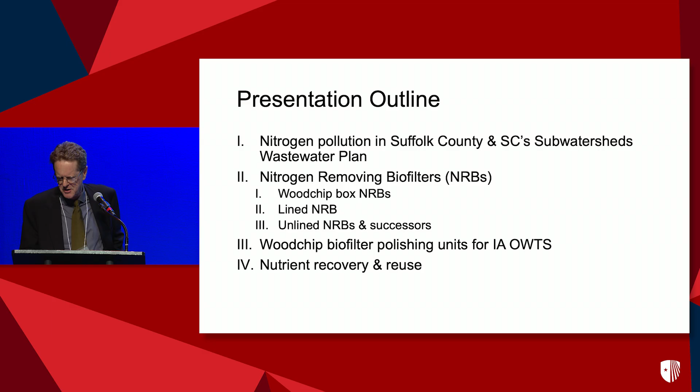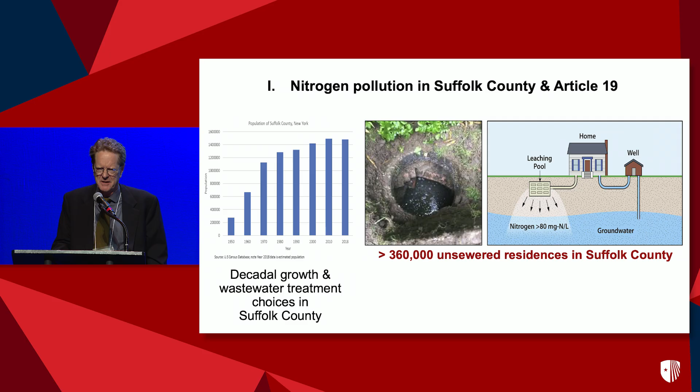Chris did a good job with this. Suffolk County's solution when the population was increasing so much in the middle part of the last century was the cesspool, and subsequently the septic tank and leaching ring. Those technologies do not remove nitrogen, nor do they remove any emerging contaminants. That saves some money in the short term, but it's not a great solution when your drinking water aquifers sit underneath those cesspools.

So what's the state of those aquifers now? About 10 years ago, DHS did some work which showed consistent nitrate increases in both the Magothy aquifer, the cleaner aquifer, and the one above it, the upper glacial. We took a look just recently at some more recent data, and those increases continue to be sustained.

But not only does the nitrate in our aquifers keep going up, it's already at a very high level. USGS monitored nitrate from public supply wells all over the country from 1988 to 2018. In that period, the median for nitrate in those wells was 0.4 milligrams per liter. So you look at the upper glacial, we're approaching 10 times the national average.

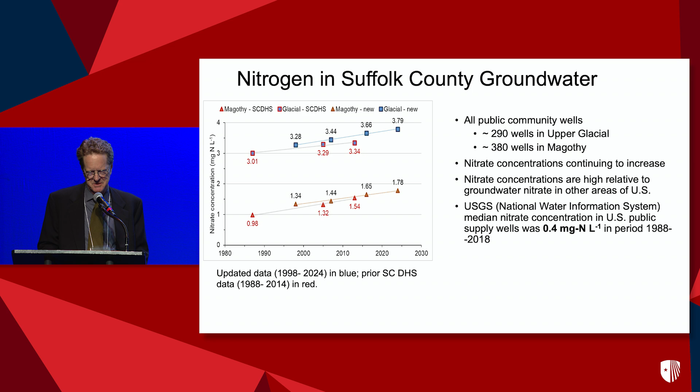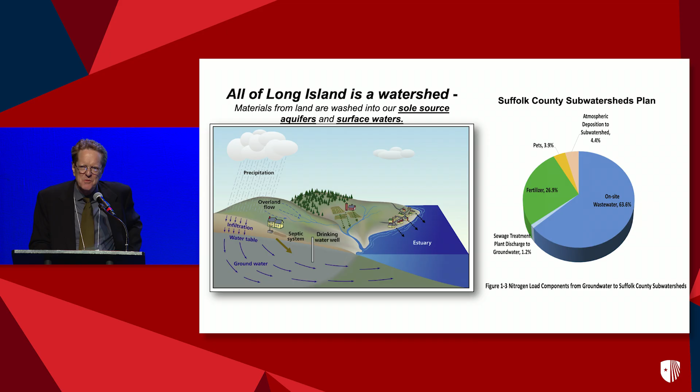Most of that water, as Chris has described, most of that nitrate is coming into those estuaries from on-site wastewater, about 2/3 of it. That's a problem for 2 reasons. One, Chris has already discussed, really negative effects on our estuaries and embayments: harmful algal blooms, algae blooms, fish kills, and loss of salt marshes, collapse in shellfish fisheries.

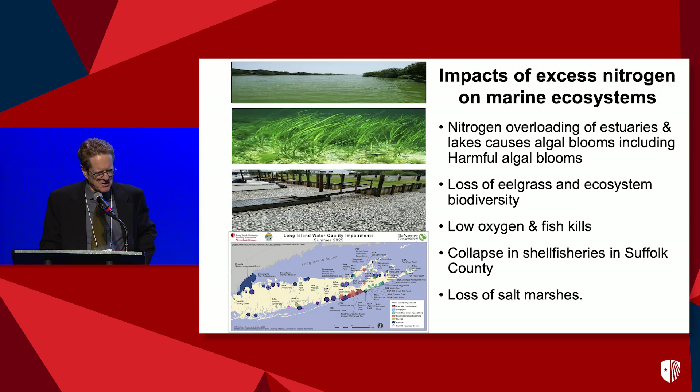But there's a second issue as well, which is that elevated nitrate is a public health concern. The World Health Organization categorizes it as a probable carcinogen. The EPA set an MCL, that's a maximum contaminant level, of 10 milligrams per liter, and that was to prevent something called blue baby syndrome, which is a very serious illness, but a very rare illness. And that was done decades ago.

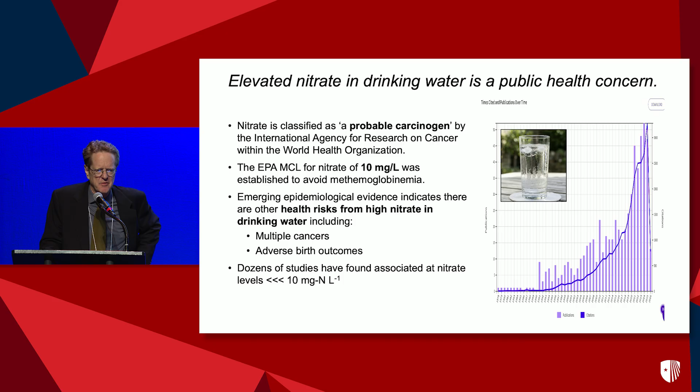In the intervening years, there's been more and more epidemiological research done on the health risks of nitrate in drinking water, particularly related to various cancers, but also birth outcomes. Some of those studies were inconclusive, but dozens of others found nitrate relationships with those illnesses at levels much lower than the current EPA drinking water standard.

The good news here is what you already got a bit of an idea about, which is that the politicians here and the authorities in Suffolk County are really committed to solving this problem, and they've got a great plan called the Subwatersheds Wastewater Plan. It's very comprehensive, and it has feasible, achievable solutions.

In addition to making funds available for sewering and for paying for conversions for homeowners to nitrogen removing systems, it also sets up a permitting process. And that permitting process has been very effective at identifying solutions that work and ones that don't, so we don't waste our time and money with what doesn't work.

So the systems up here that are approved, there are 7 of them. They're available for commercial use, either in provisionally approved or general use permitting. And they're all good. 5 of them are proprietary systems, and 2 of them are non-proprietary systems. We make these designs available for anyone who wants to install them.

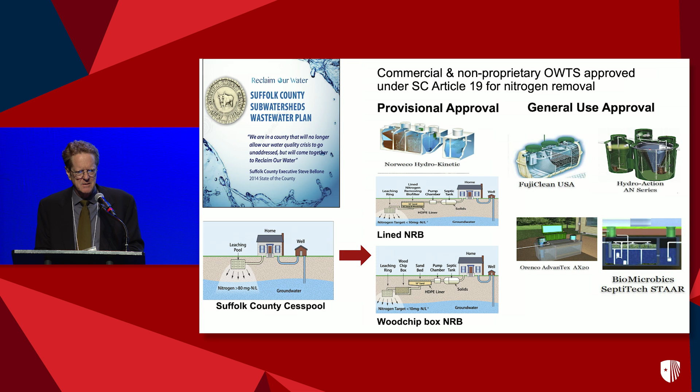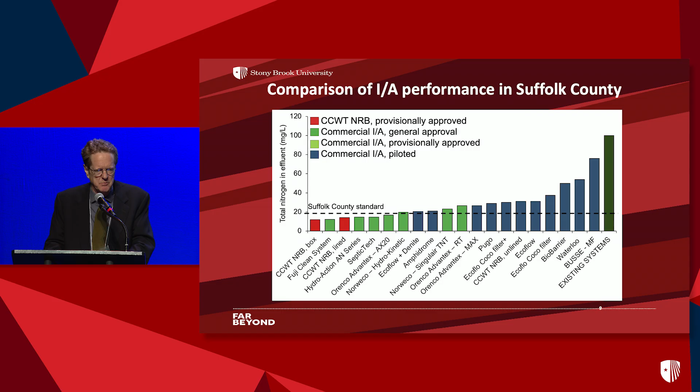So I'm going to talk now more specifically about our nitrogen removing biofilters. What they do happens all over the continental shelves around the world, and in forests all around the world. It's called biological nitrification denitrification. We just speed that process up with this technology.

So we take septic tank effluent from a septic tank, gets piped into a sand bed where there's 18 inches of sand, just C33 concrete sand. And that's all very oxic. As that wastewater percolates through that sand, it gets oxidized.

So it's transformed from compounds like ammonia or urea into nitrate. From nitrate, it can be denitrified with carbon. You need carbon for that process, and we supplement the carbon that's already in wastewater with wood chips. And you turn it into air. So that's what these systems do. They turn pollution into air.

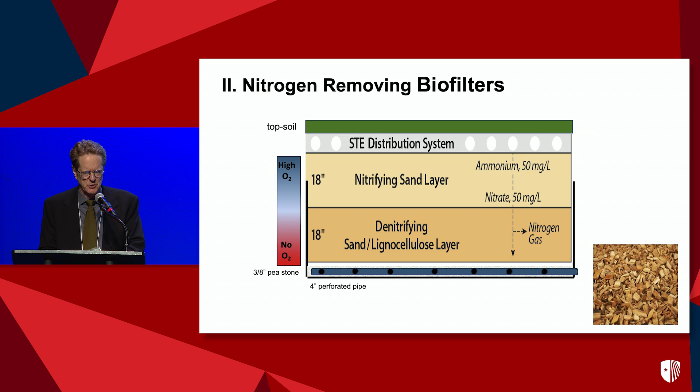We have 3 different designs. 2 of them I've already alluded to that are in the provisionally approved phase. All 3 of them have 18 inches of sand for that nitrification. The first 2 that are provisionally approved capture that percolate, contain it so that you know how long it's sitting in that biofilter in the wood chips. So you know the hydraulic residence time, and you can control it. And you need to be able to do that.

The difference between the 2 systems is that the wood chip box biofilter allows you to supplement wood chips over time, whereas the lined system has 6 times more wood chips. You don't supplement the wood chips.

The unlined system hasn't achieved the targets. But to me, it's our most interesting system, because you'll notice on the diagram there, the first 2, well you have to line them, which is expensive, and then you have to put in those leaching rings that we see all over the county, those cement structures with the windows in them. You don't have to do that with the unlined. It goes directly to groundwater.

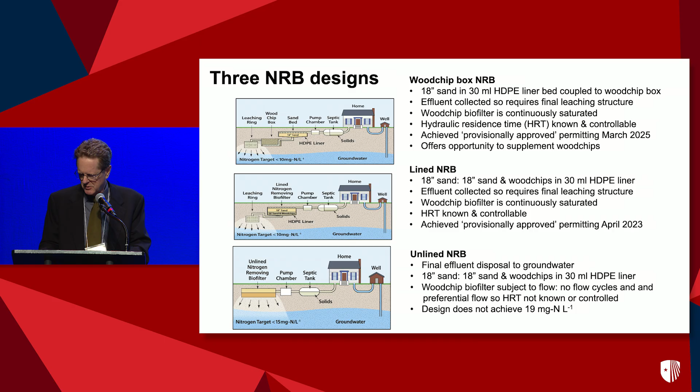So I'll talk a little more about these systems, but we have 26 of them installed around the county so far, and plans for more.

So the wood chip box biofilter, it's averaged, since its inception, the first one went in about 7.5 years ago in Suffolk County, 11.4 milligrams per liter, or about 87% removal. In the last 12 months, it was 12.5, about 82% removal.

We have another one in progress, and we've received funding from the Long Island Sound Futures Fund for 10 additional systems to put on the North Shore. We're working with great partners who have volunteered residential sites on their properties: Stony Brook School, Cold Spring Harbor Labs, the Nature Conservancy, 3 Village Community Trust, and New York State Parks.

Our center is deeply indebted to these partners, great collaborators. Our idea is, once we get 10 more systems, we'll hit the minimum to start testing for general use, and we'll test for 2 years.

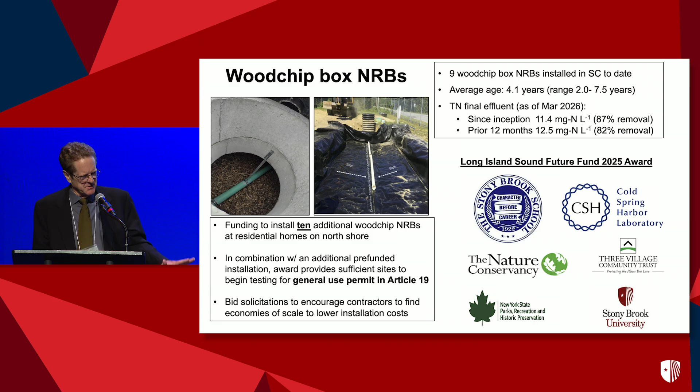We think that, and so the other piece of this grant is that we've set up the bid solicitations in a way that will encourage contractors to give us low prices by economies of scale. If you give them piecemeal work, it's not as easy to get good prices.

Lined NRBs again work very well, mid-80s removal, around 12 to 13 milligrams per liter nitrogen final effluent, well below the 19. Can we achieve this? All those systems have pumps, every system in the county has pumps, uses electricity. Can we do that with gravity with these systems that are working well?

Well, we have a prototype that's been in place for 8.5 years at the Massachusetts Alternate Septic System Test Center. What we did last June was we ripped the distribution off the top of it. We left the sand and wood chips in place, those are very valuable, being aged. And we put a gravity dosing system, pictured at the bottom of the page here, on top of it. We're still testing that.

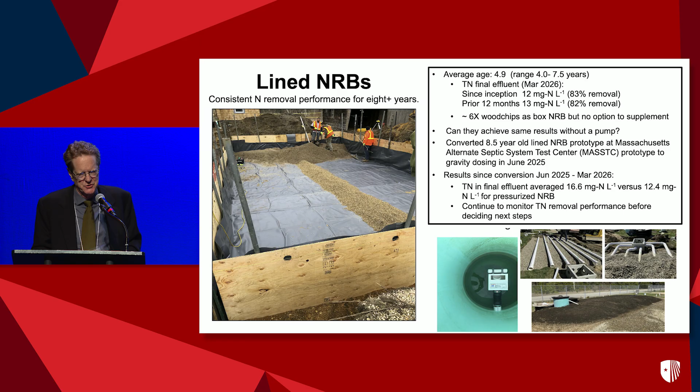So far, it's gone through the winter where it's a little harder to achieve low effluent levels, but it's been 16.6 milligrams per liter versus the 12.4 it had before we made the conversion. So, work in progress here.

Our real R&D focus for nitrogen removal is figuring out ways to get those unlined NRBs to work. We're taking two approaches to this important research area. One is a gravity-based NRB that has a Septi-Surge dosing system and an Eljen disposal system attached to it. Second is what we call a multi-layer NRB.

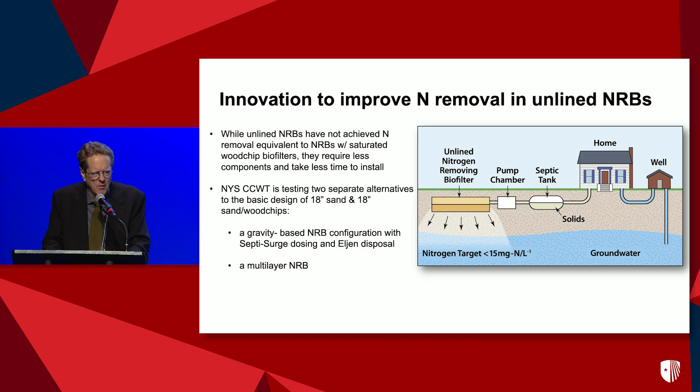In that gravity system, wastewater comes out of the septic tank and builds up in a dosing reservoir to a certain elevation, which triggers the Septi-Surge to flush that septic tank effluent into the Eljen geotextile sand filters. Those sand filters sit in an unlined NRB, 18 inches of sand and 18 inches of sand and wood chips.

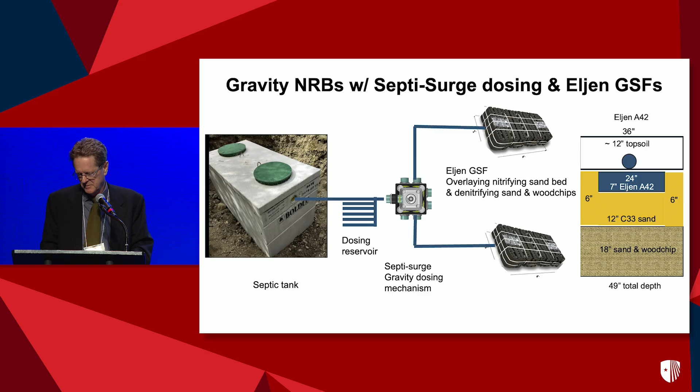Does it work? Indian Health Services in Shinnecock Nation put in these systems over 3 years ago, and we've been monitoring them since. These systems use no pumps, no electricity, and have very low O&M. 5 out of 6 systems get 4 or less milligrams per liter. The outlier brings the average up to about 12.

Another example of a partnership: Suffolk County Water Quality PRP awarded our center money to install 5 of these exact same systems in Suffolk County. We're going to be putting those systems in over the next several months, so within 15 months we'll know if we have low-cost systems that produce very, very low levels of nitrate.

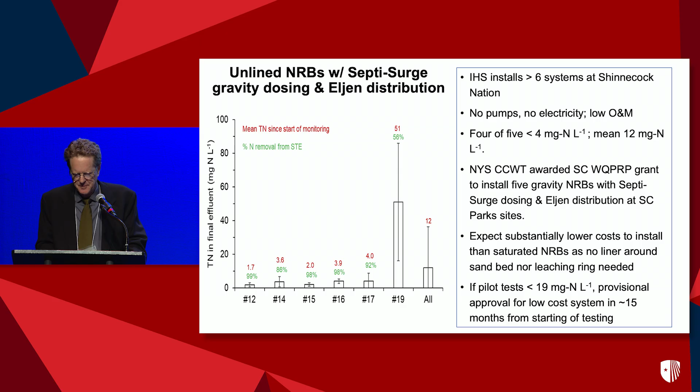The multi-layer system I mentioned before is also unlined, but we break up that wood chip biofilter because what we noticed from our earlier work with unlined systems is that even though the water percolates very evenly through the sand, when it hits the sand and wood chip it begins to get preferential flow.

So what we've done is, every 6 inches of sand and wood chips, we put 2 inches of 3/8 inch pea stone. That does two things: it causes a capillary break, slowing the percolation down and allowing more treatment time, and it spreads the flow more evenly so we don't get that preferential flow which speeds up and reduces treatment time.

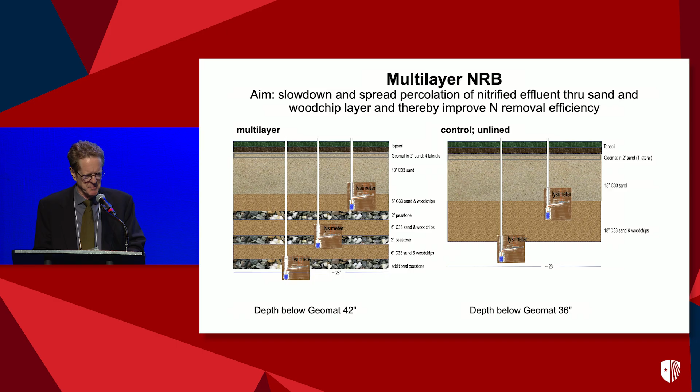How has that worked? We started this in March of 2023. Over that period we've had to amend the influent so that it's Suffolk County-like. Suffolk County has really high septic tank effluent levels, because we monitor it at those 26 sites I showed you earlier—over 90, compared to the 60s national average, so about 50% above the national average.

The unlined system we use at Mastic serves as a control. It's right next to the multi-layer and receives exactly the same wastewater. It reduced that 90-plus effluent by half. The multi-layer reduces it by 84%, consistently to about 15 milligrams per liter. Again, no septic, no leaching rings, no liner, and it does it in much less time.

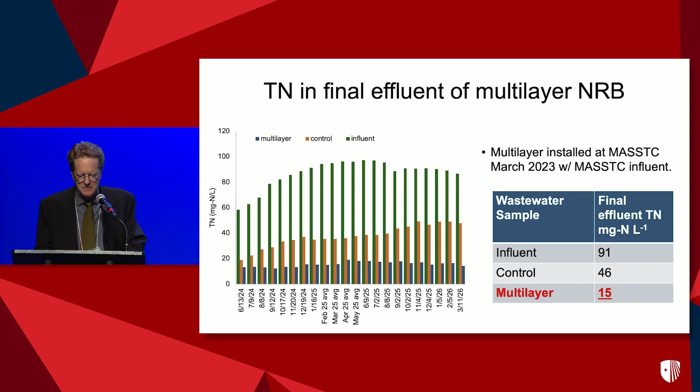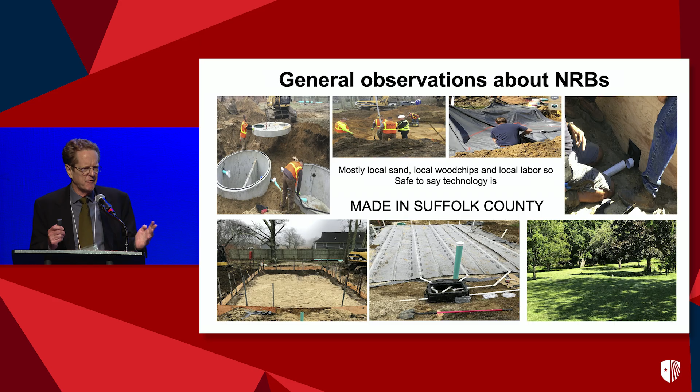So a couple of general observations about nitrogen-removing biofilters: they are truly made in Suffolk County—local sand, local wood chips, and local labor. Our center is working with installers to increase the base of installers who are able to do these installations.

We're also often asked what wood chips work best, and the answer is oak. It's also a good idea not to have debris in your wood chips, and if you're interested in that, I can talk to you about it at lunch.

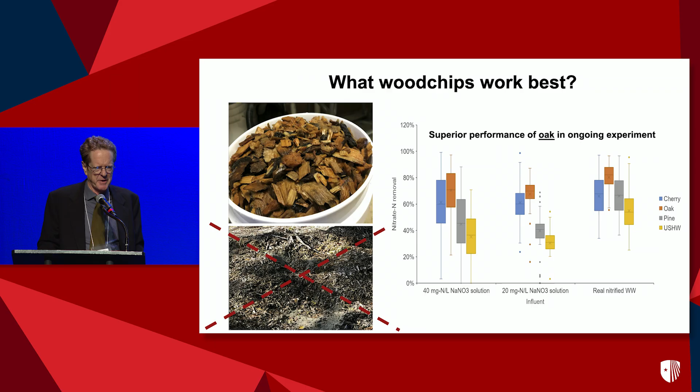How long do wood chips last? With a collaborator, the Massachusetts Alternative Septic Test Center, we've been working on this. We have a wood chip box NRB up there that's been in place almost 10 years. Since inception it's been getting 11.5 milligrams per liter total nitrogen in the final effluent. In the last few years that level has risen—in the last 12 months it was 16.5, still passing Article 19, but not as good removal.

What we did was take some wood chips out of the system and put them in a bench-scale experiment where we loaded it just like in a wood chip box, upflow. We loaded it with 31 milligrams of nitrate, and it reduced that to 3.3.

In other words, 89% removal, exactly what it got when we first started out 10 years before. In the first several years, we were getting high 80s removal. The point here is that the remaining wood chips have not lost their denitrification capacity. They still work, but they've been denitrifying for 10 years, so there's less of them.

So what do you do? Well, you could supplement, because you can open that wood chip box and put more wood chips in. How much more wood chips do you need? Well, about half of what would fit in a Ford 150 pickup truck. So supplementing is just part of ordinary operations and maintenance.

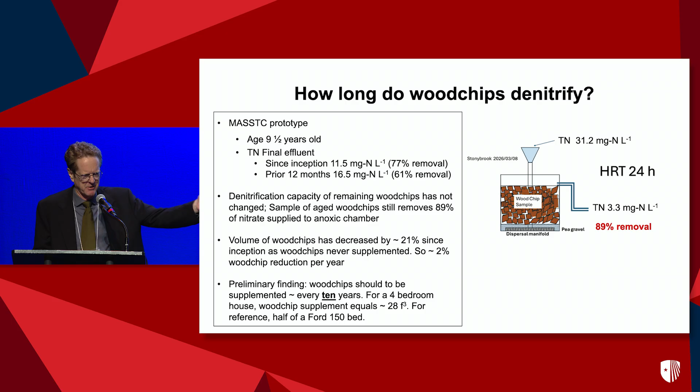And then the lined and unlined NRBs, well, they have 6 times more wood chips, so they're lasting decades and decades. They do take up more land though. That sand bed is big, about 600 square feet for a 4-bedroom house.

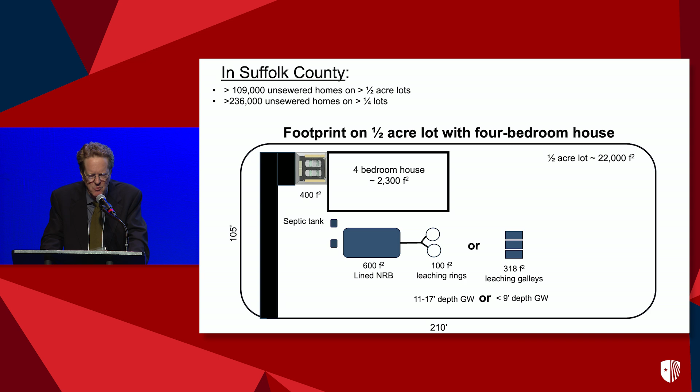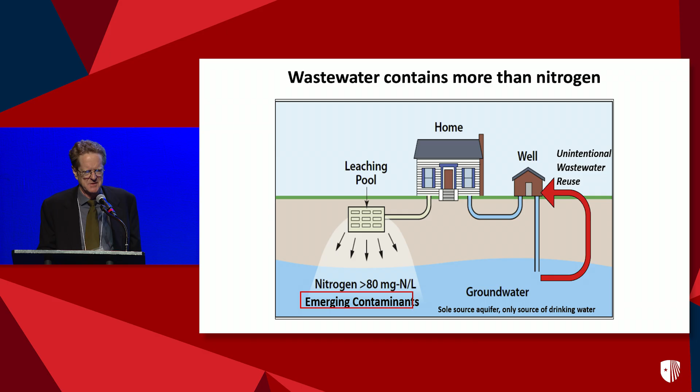But there's something that comes with that large sand bed. Because, as Chris has mentioned, it's not just nitrogen that's in our residential wastewater. There are pharmaceuticals, personal care products, organic contaminants, phosphorus, and a lot of other things you wouldn't like to drink, like anticonvulsants, or I personally wouldn't.

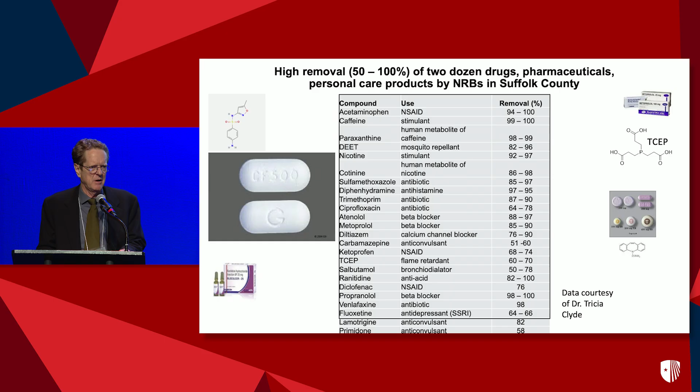And so we had Dr. Tricia Clyde get her degree studying our NRBs and how they treat organic contaminants from common household products. And what she found was that not only are NRBs capable of removing organic contaminants from personal care products, but they do a better job than conventional wastewater treatment systems, or as good.

But more importantly than that, she found it wasn't just that large sand bed was absorbing those contaminants as a problem for a future generation. They were metabolizing those contaminants, getting rid of them, and that's really critical.

A driving force in this was her professor, Bruce Brownawell, who is one of the founding members of our center and made enormous contributions. Very unfortunately, and very too early, he died last year of ALS. He is certainly sorely missed at the center.

I'd like to talk about coupling these wood chip biofilters to commercial technologies available for nitrogen removal. Just very briefly, Massachusetts - one thing those nitrogen removing systems, referred to as IAs, are really good at, because they have aerators, is nitrifying. They nitrify really well. If you look at what's in their residual wastewater, it's nitrate.

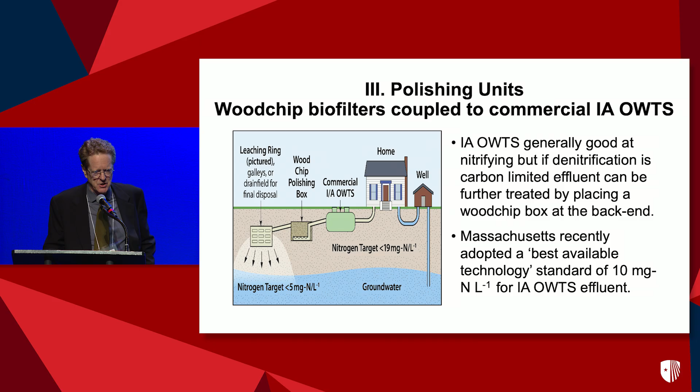So to get down to that, how do you do that? Well, a wood chip box polishing unit is one way. We put one of these down in Wainscott back just around the time of COVID. It's been averaging - the system itself, the IA itself, didn't meet the 19 milligram target, it's been about 25 milligrams per liter. Our wood chip boxes reduced that to 9.

We put another, actually better designed system in Sag Harbor, with the same influent coming from that IA in the mid-20s, and it's reduced it to under 4. We just put one in Montauk. We want to put a lot more of these in.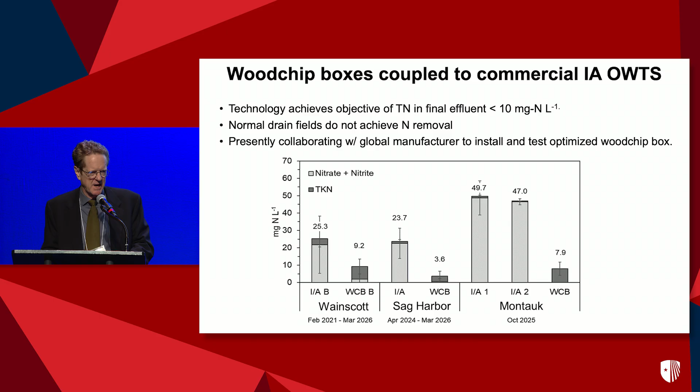We're doing that because there's no secondary treatment in Long Island soils, or most of them. The percolation rate is too fast. So we're working with a global manufacturer to install, test, and optimize more of these systems so that we can get really low nitrogen levels.

I'll talk very briefly about urine diversion. The idea here is you first separate it, store it, disinfect it, and then you can either apply it directly or capture the nutrients. In general, that's a really good idea because there are a lot of places where it's really difficult to put in an IA system or any kind of on-site system, like a beach, a public bathroom at a beach. It's difficult because the strength of the wastewater, the nitrogen, is really high. But most of that nitrogen is contained in urine, not in other components.

So you can save a lot of valuable clean water that could be used for better purposes than flushing a toilet. But there's even more benefits in Suffolk County because New York State parks now segregate their wastewater.

So we have a source of urine. We don't have to, like they have to in some states, pass plastic bottles around the university to do this testing. We get it from the New York State parks. We have a sole source, as you all know, of very valuable drinking water in the Magothy and the Lloyd, and we need to protect it.

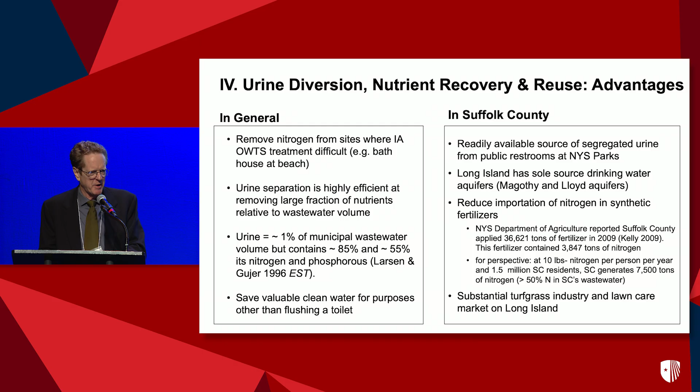So also, we don't just have supply here, we also have demand. There's a huge turf grass industry. We're not selling a lot of potatoes out of state now, and I think most of you will probably agree, Long Islanders care about their lawns. So there's a huge lawn care market.

So how can we make this urine diversion, recovery, and reuse work? So we did try direct application. It's not for everyone. Some farmers up in Vermont do that to grow hay. I tried it, but it's not just the smell, it's really expensive to transport urine around. It's too much volume. So after we pasteurize it, we capture the nutrients.

Right now we're using zeolite. There are a number of different types of zeolite. It's a very common, inexpensive mineral, and we've tested it at different liquid to solid ratios and different types of zeolite to find what works best. And then we put it on plants in the soil to see how it works.

The process that we've developed is a sequential process of applying the fresh urine to zeolite. Some zeolites work better than others. You can reduce the nitrogen in the wastewater to levels where we could just introduce it into the environment with this process.

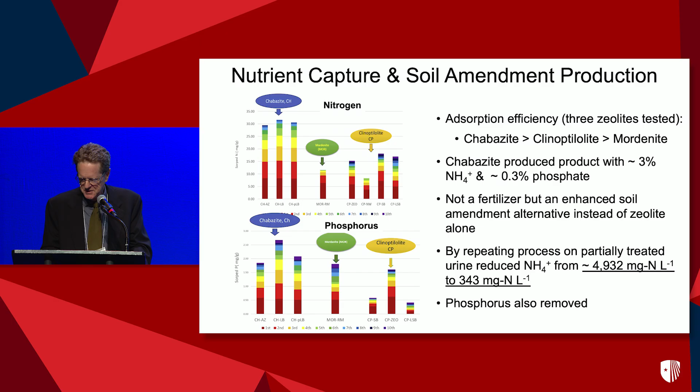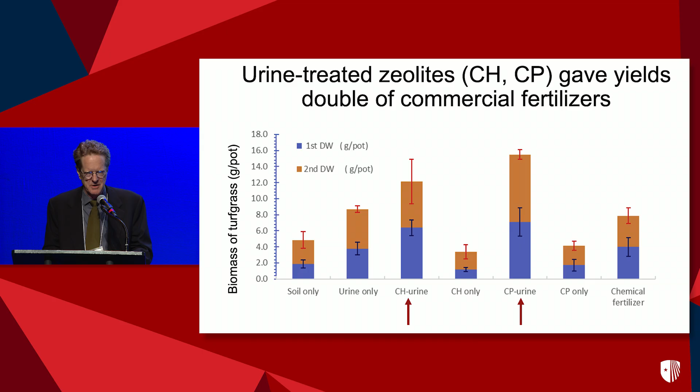How does it do on plants? You see the red arrows in the graph? Those are zeolites - one is chabazite, one is clinoptilolite, that's treated with urine. And the y-axis here, that's the biomass of that turf grass. So the experiments we did have demonstrated that zeolite treated with urine does better plant growth, turf grass growth, than does commercial fertilizers, soil only, urine alone, or just the zeolites themselves.

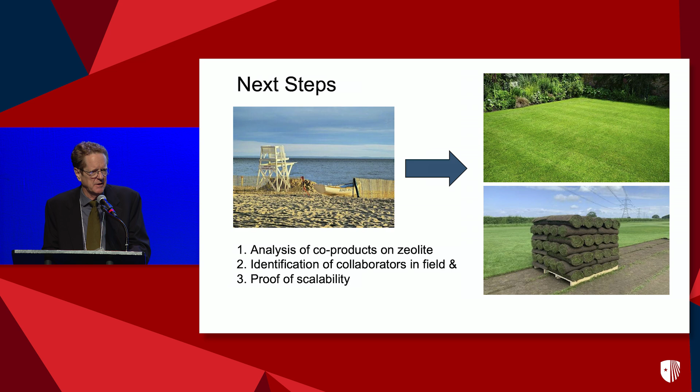So next steps, we're in the process now of making sure that none of that zeolite contains any undesired byproducts or co-products. And then we're going to be looking for collaborators who can help us in the field to prove that this technology is scalable.